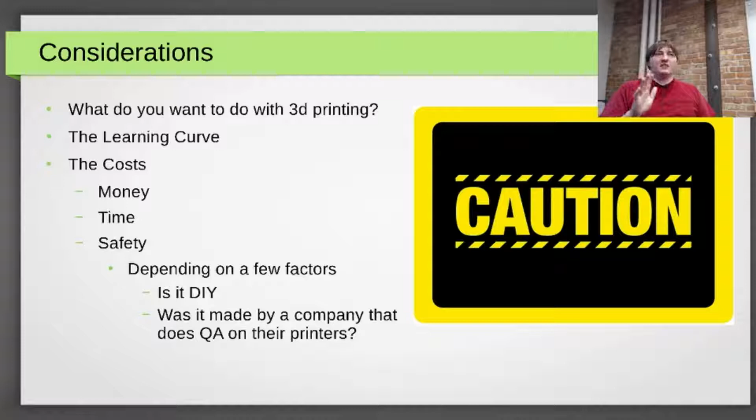So with the RepRap project - RepRap stands for Replicating Rapid Prototyper. It was started by this guy, Adrian Bowyer, I think he's emeritus professor at a school in London somewhere, in the UK. And as the story goes, his school had a 3D printer back before it was common to have, before this project existed, and he looked inside and was like, I can do that. That's not mechanically complex.

Once the patents expired on that printer, the project took off. The project really did break off. One thing that I think is really cool about 3D printing is it's a really strong testament to open source and how successful it can be when done right.

It was born in open source. People were sharing ideas back and forth. They went through this evolution period. The first RepRap printer - he had a PhD student do the first draft - and so the Darwin was born.

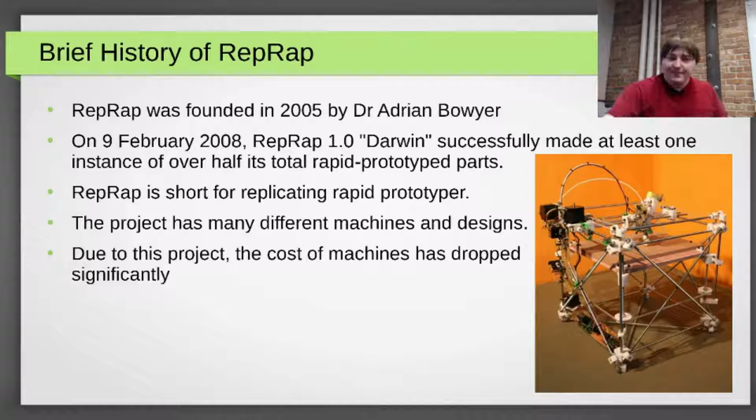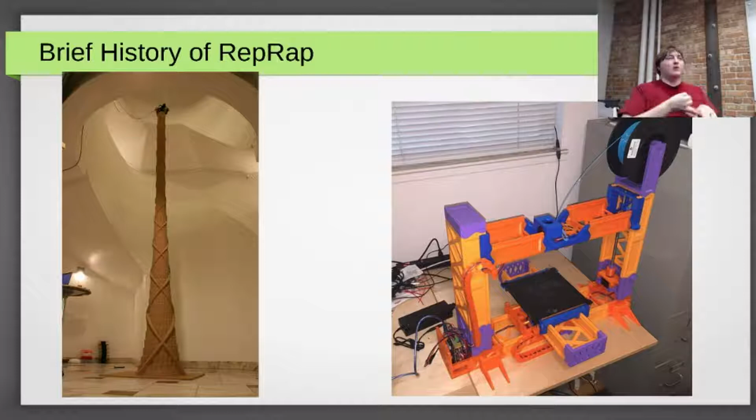The one on the right is called the Snappy. This one is relatively new, in the past 2 or 3 years. It's the mostly 3D printed 3D printer that is also self-replicating - this printer can print the parts that make it up for itself, minus the electronics and motors and things. Just really awesome.

Which brings us to this point. Not all 3D printers are RepRap-like. The ones that are RepRap are the FDM 3D printers, sometimes called FFF, which is just a fancy way of saying you melt plastic and draw pictures in layers.

The main idea here is you have your spool of filament, whatever material it is, you force it with gears through a superheated hotend, and then draw 2D layers, one layer at a time, building it up and up.

This printing process has some really cool features. Like these, I brought some show and tell. These octopuses with their joints were printed this way because of how the layers work. If you look at a link, you can cut this into layers and still have it support itself. You guys can look at these if you'd like. I also have these coasters, which are less interesting, but they're useful.

Anyway, the main safety concern with FDM is fires, since you have electronics that are heating things up. The two hot parts are your bed that you print on—sometimes you can print on a non-heated bed, but it limits the materials you can print easily—so the heated bed typically goes between 50 to 100 degrees Celsius, and the nozzle, which at minimum you print at 170 to 250 degrees.

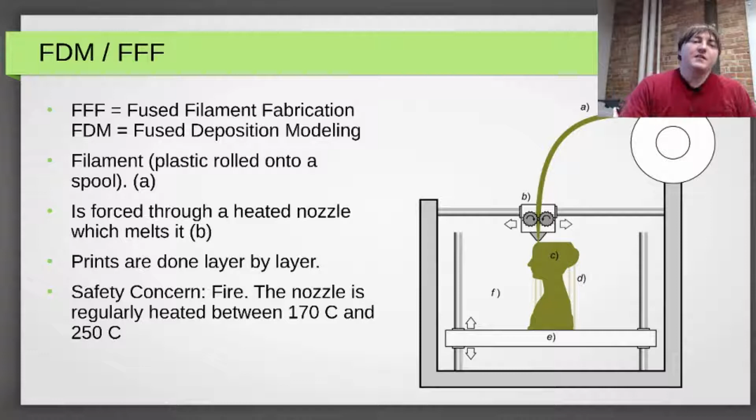The next kind of 3D printing is SLA 3D printing, stereolithography apparatus. Basically, you take this resin, and it's liquid at first. You put it in this vat, and you use a laser—whether it's a screen with UV light that prints at a certain pixel depth, or just a laser that points at a mirror and shoots at specific parts—and it will harden the resin as your print comes out.

It's kind of cool to watch. If you've ever seen a time lapse of this, it looks like somebody's just pulling—you know that old magician trick, the hat and the rabbit? Looks just like that. It's really cool.

Its main safety concern is just the resin itself. The resin is toxic—you wear gloves, you wear goggles, you don't breathe it. This has also typically and historically been much more expensive to print with. For example, the resin itself will cost you more than your spool of filament for FDM 3D printing.

So this kind, however, is starting to take off. If you're going to do something like 3D printing miniatures, this will achieve a much higher resolution and a much finer detail, if that's your goal. Typically you can get small—there's a printer I saw that's about $200 with a really tiny print resolution, but if you're doing miniatures, that's perfect.

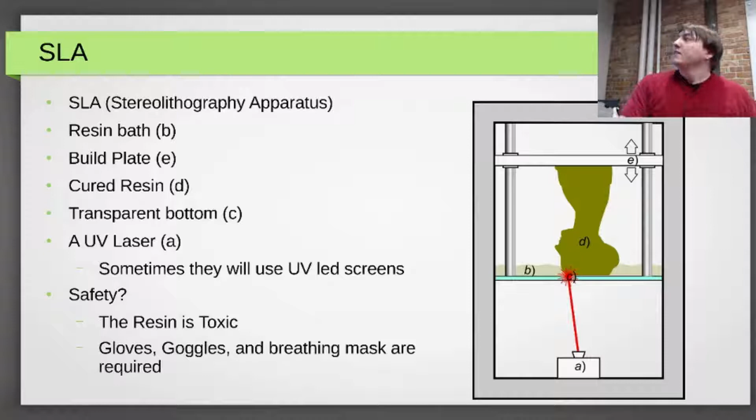Then the last kind is SLS, selective laser sintering. This is not a home viable solution—it's very expensive. I think the cheapest one I saw was either $6,000 or $9,000 for just the printer. Its main safety concerns are the fine nylon powder it uses to print, melting that nylon powder into your shape, and also there's a chance it'll cause conflict because of how much you decided to spend on this thing.

Its main advantage—if you think about the other printing styles, SLS versus SLA and FDM—is that you can't print over nothing with those, which is almost true; you can bridge small gaps, but you can't print an area that starts on nothing.

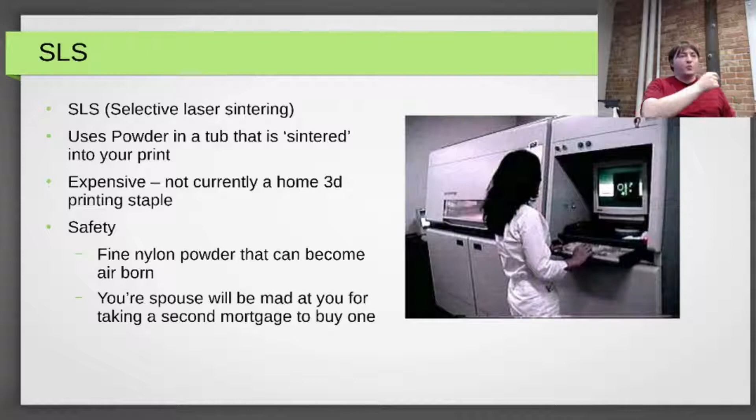With this, however, the way it works is it fills the chamber with powder at every layer. The powder that is not melted will support every layer on top of it, so you can get fine details without having to print support materials into it.

This is the part where we talk about the basics of the FDM printer's anatomy, like what it looks like and how it works. The basic parts I broke it into are the frame of the printer and the axes of printing, the extruder that actually melts the plastic and how that works, the print bed, and the electronics that control the whole operation.

This is probably the most common print design right now, the i3. Prusa himself, the guy it's named after, makes this 3D printer, but he's open sourced the design, so there are plenty of knockoffs on the internet. Mine is a knockoff that costs less than $200, which I don't actually recommend everyone getting. And spoiler alert, this is one of my recommendations. His printer costs around $700 to $1,000 - $1,000 if it's pre-assembled, or around $750 if you get it in kit form.

The way it works, if you see the dragon where it's sitting, that bed is your y-axis and it moves during the print. The print head moves left and right, and then up and down on 2 motors, and that's how the motion works.

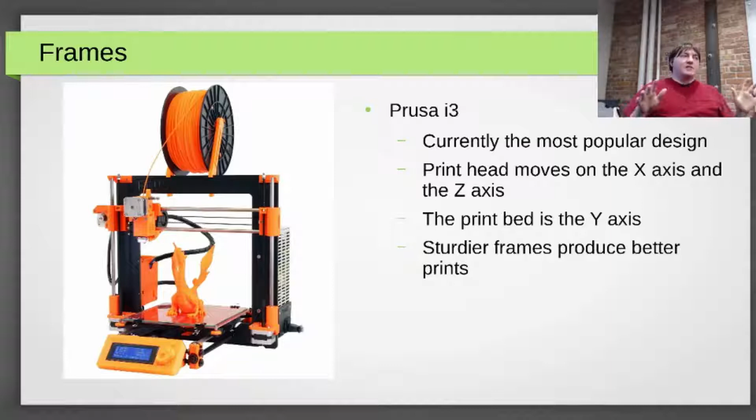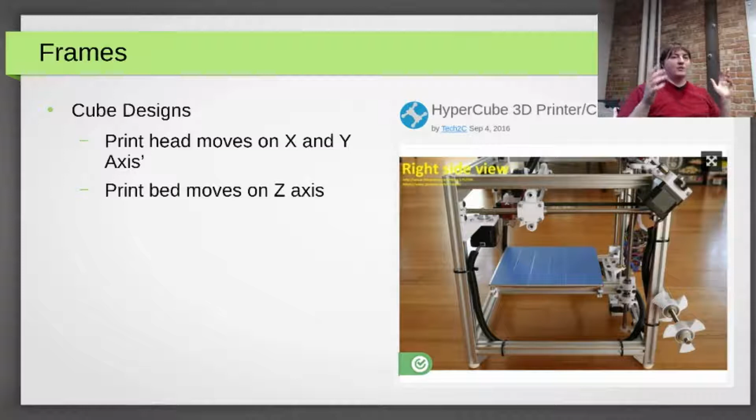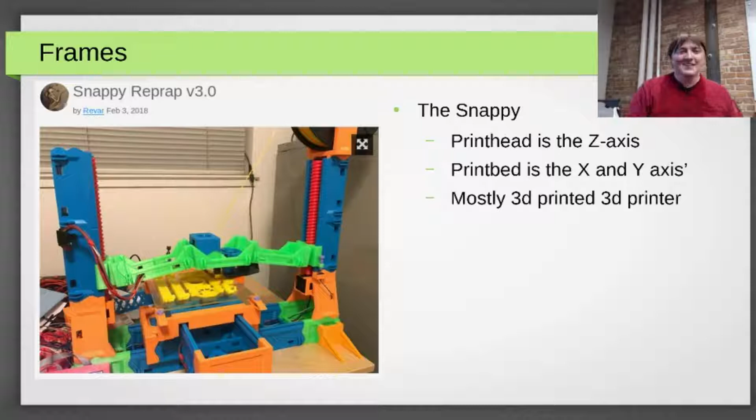And then this print, you've seen the snappy, I've never seen anything like this. This one, the print head stays stationary, only moving in the z-axis up and down, and the print bed moves in the x and y direction. It's so weird to watch when it prints. So this one is one that I added last because I'm like, oh yeah, these exist.

It's called a Delta printer, which has motors on each of those 3 rails. Delta, I think that has something to do with geometry and math. Anyway, they each move independently, and to move the print head where it needs to be, generally they have a circular base. They can achieve higher precision than the other styles.

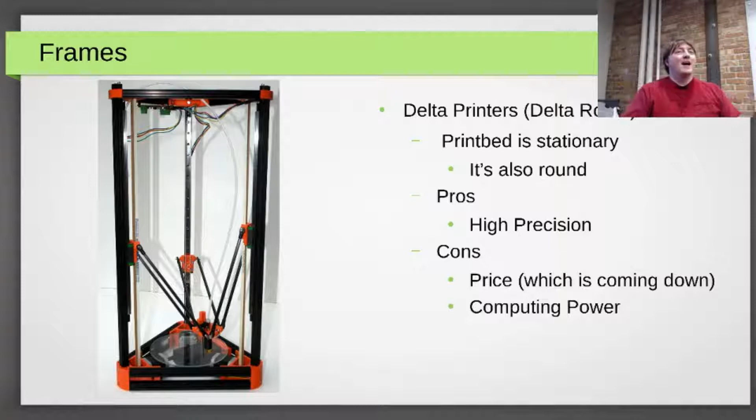Those other styles we covered are called Cartesian, which I think has something to do with the fact that it's a square and uses a grid system that's not a circle. If I remember correctly, Delta is actually a reference to the Greek letter delta that is shaped like a triangle, referencing the footprint being a triangular shape because you have the rails at the 3 corners. That makes more sense to me. I don't have a Delta printer, but yeah.

I put this GIF in here to kind of show how it works, because it's not as straightforward for my brain to grasp, and I thought maybe others would like to see a little bit of motion to show how it controls itself, because it's completely different.

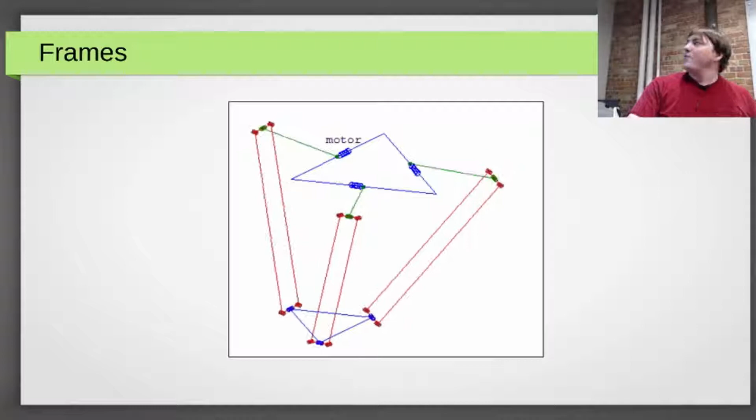One other point - these Delta 3D printers, because of their triangleness, use more processing power. Most of the FDM Cartesian printers use an 8-bit board, an Arduino, as their control board, and it works just fine. But Delta requires more math, and typically that doesn't mean you can't run a Delta printer, it just means it'll run slower than you might otherwise like. There are 32-bit boards though.

Okay, the hotend and the extruder. The basics again are you have filament and you push it through. The way it pushes through is you see that gear, and the gear is next to what is called an idler. The spring pushes the lever arm into your filament, which pushes it into the gear and holds it in place.

Then the gear pushes it through and goes through that. See the aluminum block on it? That's called the heater block. You'll have a wire plugged in that makes good contact and heats the block, that's all its purpose is. And you'll have another one, typically a thermistor, that tells the control board how hot it's gotten.

The two parts of the extruder: we have the hot end, which is the bottom part, and the cold end, which is the top part. We want to keep the cold end cold and the hot end hot. Typically people will put a fan directly on the extruder part so it prevents heat from going back up into the system and helps your filament melt consistently and go through.

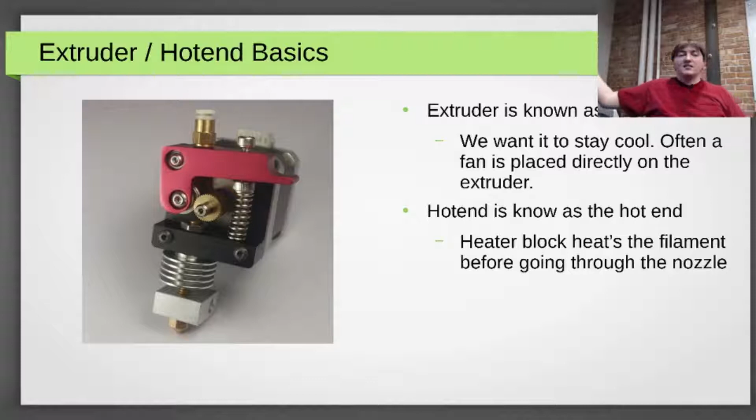That's what it is. This style of extruder is called a direct drive extruder. There are lots of kinds of filaments. Flexible filaments are a thing, you can make your own flexible phone case. People have 3D printed their own shoes, you can find models online if you want to print your own shoes, though I don't know how well that will work out for you. The direct drive has the advantage of handling the filament very tightly and confined, so it can get it from point A to point B, and that's why they work better with that.

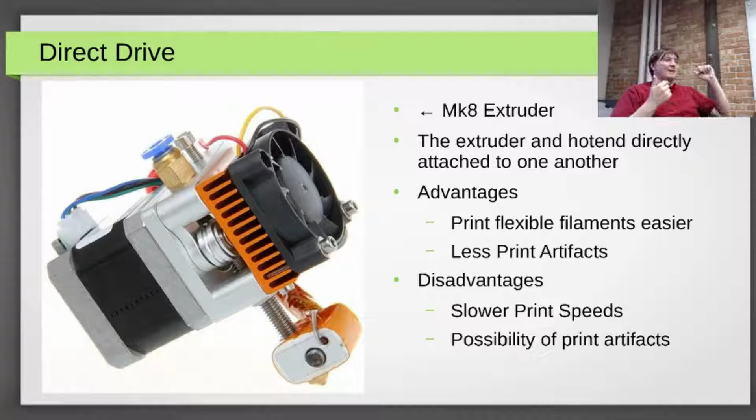The other style is called a Bowden, where you still have the hot end and the cold end, they're just separated by a long tube. So you force the filament through the tube, through the extruder part, and then it gets to the hot end and melts it. The advantage of this is you have a lot less weight on the end.

The disadvantage is when you're printing, if you jump between two parts that aren't supposed to have filament, it needs to do what's called a retract, because the filament's just going to keep going. Retraction just means the gear spins the other way and sucks it back in. With this style, the retractions are not as quick, there's a lot more distance to cover, and so they will result in stringing. There are tests for this where you print two poles and see how well you've got your stringing under control.

But the advantage with it is faster print speeds, which may or may not matter to you if you're doing it as a hobby. But if it does matter, you're probably just going to put up with the stringing anyway.

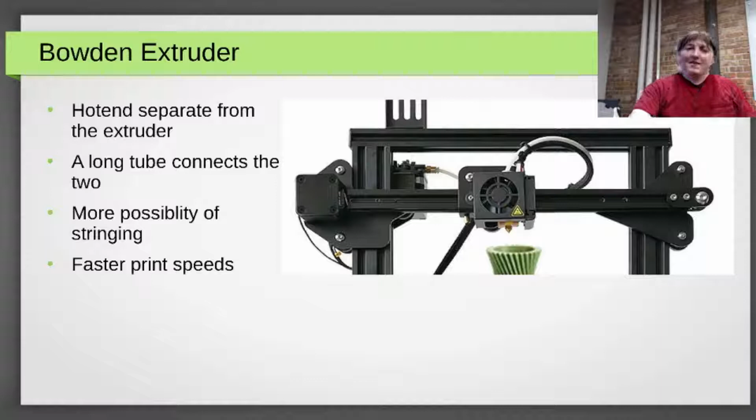So print beds, there are different styles of surfaces that you can print on. The idea with your print bed is there's a lot of motion going on while your part is printing, you need to make sure it stays on your print bed. Some common ones are just putting painter's tape on it, which has a really good surface for that. Glass and painter's tape will work well for PLA, which I'll cover the materials in a bit, but not any of the other materials really well. Glass in conjunction with a heated bed, which is the board underneath it, also works well for PLA.

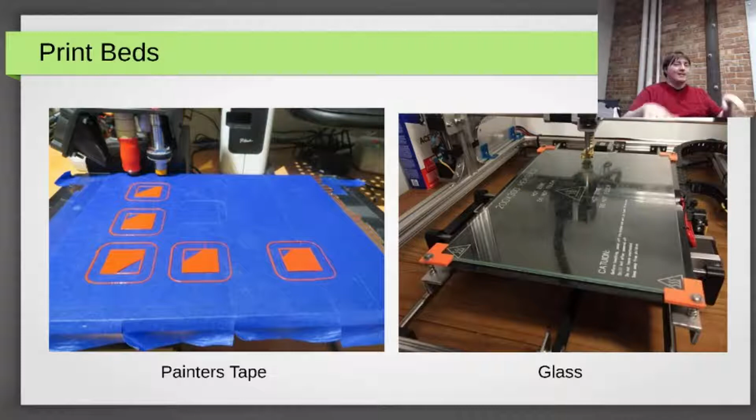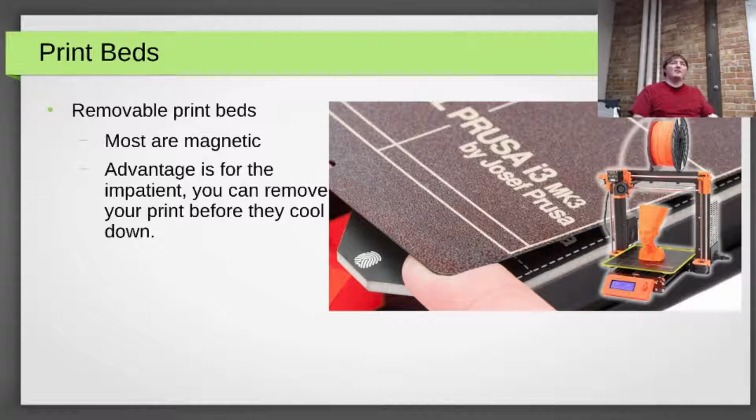Also, something I do is put a little bit of glue, PVA, on the bottom, and for prints that just aren't sticking, I put glue on, which creates the same rough surface that allows it to stick to the bed. The other kinds are removable print beds, which can also be coated. They're generally coated with things, but most people like them. I feel like they're for the impatient, because you can take your print off while it's still hot and just pop it off without having to get a scraper or something else.

The classic combo for control boards is an Arduino Mega 2560 and a RAMPS board, which just plugs into your Arduino board. Most kit printers don't actually need this separately, though—most kit printers actually come with an all-in-one board that combines the Arduino controller chip with the plugs for everything else.

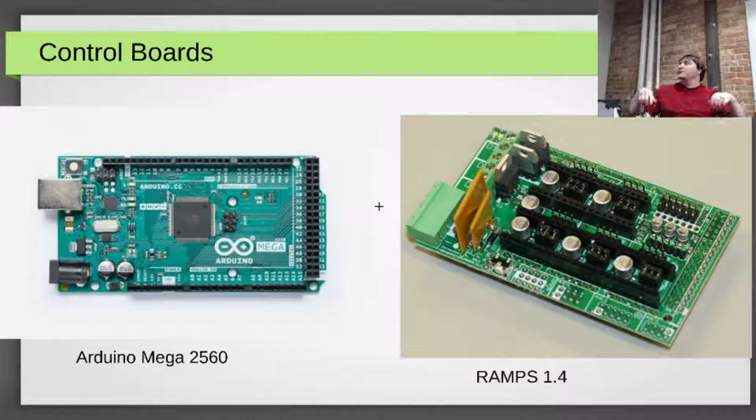This is not quite sufficient on its own. You also need stepper drivers, which tell your motors how much to move, how far to move, and so on. They're adjustable, and depending on your printer, you can run them without active cooling, though sometimes you need it. The slide I skipped over is the firmware—that's just the program that runs on your Arduino and tells it how to operate.

There are other accessories you can get. A common question is how you start your print. You can get an LCD screen with a knob, plug it in, and program it with your main board—that works. You can also just plug a USB from your Arduino into your computer and use a controller interface there. The advantage of a separate LCD screen and SD card is you don't have to keep your computer plugged in, so if your computer dies, your print stays alive—though if your computer dies for an unknown reason, chances are your printer's in a bad position too. But it also means you don't have to tie up your computer, which is nice if you're using a laptop.

Do you have any suggestions on what you could use software-wise on your computer?

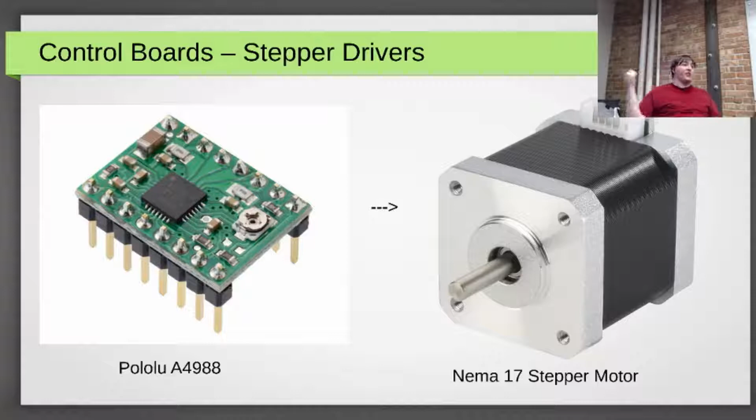Let's see—oh yeah, FDM print materials. This is just a bunch of information; I tried to put the key in the upper left-hand corner.

One thing about materials: apparently, from what someone else was saying, glass transition temperature is kind of a fake measurement, but it's still useful, so we're using it. That's the point where your print will start to become all wobbly again.

These prints I brought for show and tell are all made out of PLA, polylactic acid, which is a plant-based print material. If you had a high-heat composting environment, you could decompose these naturally, but without high heat they don't decompose well, so it's still kind of a problem.

The PLA, if you leave it in your car on a hot day, will deform—not quite melt, but deform. However, PLA also has this really interesting property, a lot of them anyway, where if you leave them at the right heat for long enough, they will anneal and become heat resistant, which is really cool.

There's a kind of PLA called high temperature PLA that is specifically made for that, and you can print heat resistant and very strong materials with it.

One of the other things about PLA that you'll run into, like the octopuses, they're glow in the dark. The glow-in-the-dark filament is actually an abrasive material.

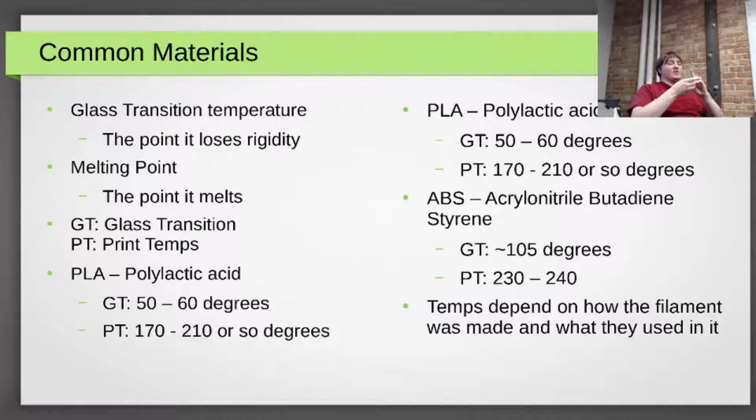Going back to the hotend, the extruder part, the nozzles are made of various materials. The most common is brass. You should not print glow-in-the-dark or any abrasive material with a brass nozzle, because the diameter of the nozzle will change very quickly. What you do with abrasive materials is you get a hardened steel nozzle or a ruby tipped one. They have those. I don't have one, but you need something that's more resistant to wear, and those ones will not change while you print.

Of the two other ones, ABS—its main disadvantage is, all of these, when you print, sometimes you'll get a smell. PLA has a sweet smell, being plant-based and sugar-based. ABS is acrid, and most people agree that it's probably not good for you.

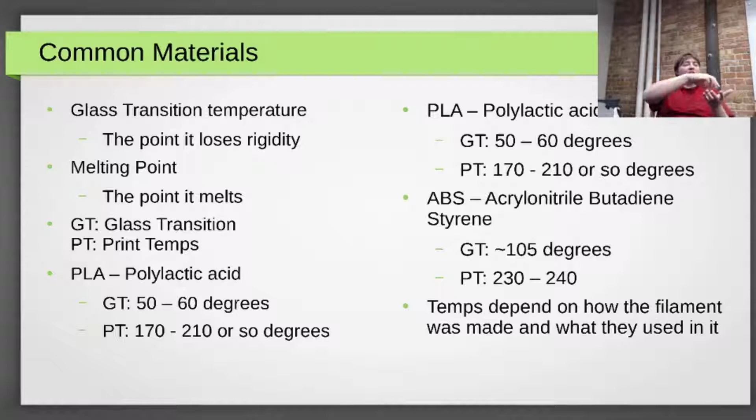There's another material that I put PLA twice for. What did I do? Am I dumb? One of those was supposed to be PET, which kind of has the best of both worlds. Its glass transition temperature is not as high as ABS, but it's still high enough that it's useful for working parts. It also doesn't have the same acrid fumes.

Isn't that the plastic that things like drink bottles are made out of and stuff? Yeah, it is actually. I don't know how easy it would be to turn your old drink bottles into it, but it's the same stuff most of the time.

But there are also many kinds of PET. The print temperatures, however, for PET are a little higher, usually than even ABS. Some PETs are low enough that you can still do it on a regular printer. But anyway...

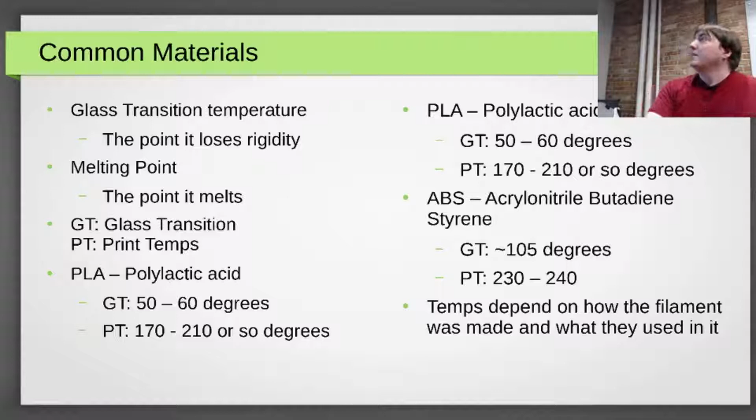Before getting into how to print, one thing that I mentioned but didn't really go into detail of: the hotend that you're forcing your material through. In general, they're lined with PTFE, which has an acronym I don't remember what it stands for. But it's sort of like Teflon, it's non-stick. The main reason for that is if you have imperfections in how your hot end and heater block and everything was drilled, your material will stick to those imperfections. It needs to be super clean. But with PTFE going in there, it doesn't have to be as well machined, and it can get through.

The downside of using PTFE is once you get to about 240 or 250 degrees Celsius, it will start to decay and degrade and do nasty things from what I understand. I haven't tried this and I don't plan to. There are companies that make all-metal hot ends that are machined very well, and those can print at temperatures as high as 300 degrees Celsius before the aluminum starts to melt.

Anyway, so the basic process for 3D printing is you either create your 3D model or download one from Thingiverse, which is most of these. I didn't design any of these. Other people designed them, I printed them, because good practice.

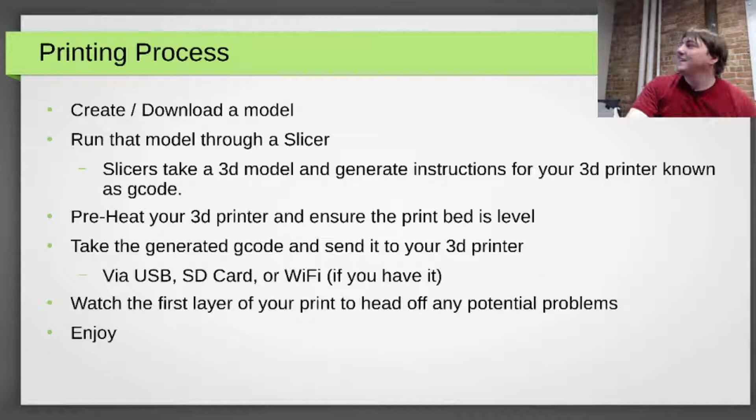And now for the recommendation portion of the show of 3D printers. So I went through and I selected a cheap printer and then a more expensive printer, both sub $1,000, because that's important to me. There are plenty of other printers out there, so if you're going to get into 3D printing, it's okay to spend some time doing more research.

But the first one is the Ender 3. This one is because it's probably the most common. It's made by a company called Creality, a China-based manufacturing company. Their product works really well out of the gate. It's not perfect, but it also has improvement potential. The main flaw I can think of off the top of my head is on the original Ender 3, not the Ender 3 Pro, their fan duct is facing up.

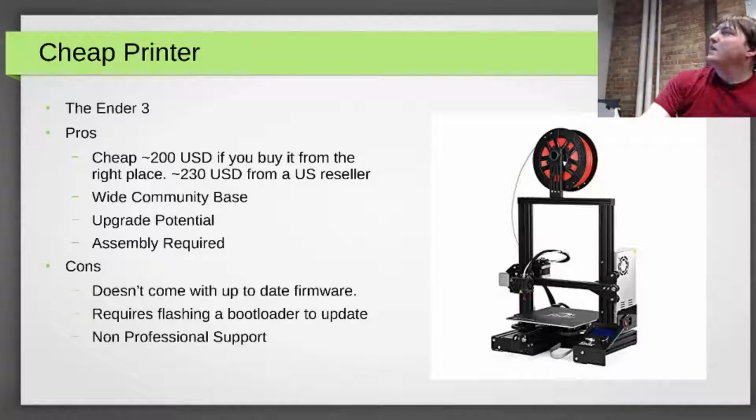And then the expensive printer, the Prusa i3, made by the guy who made the i3 design. You buy it, and there is still a wide community base. You get good technical support—he hires staff to answer questions. You get all the bells and whistles of 3D printers. This one comes with a removable print bed, it still has the same sturdy design, and it has some custom features like collision detection.

One thing that happens to your prints as they go, especially if you don't have good enough cooling, is your prints will warp—the layer will warp up, which can sometimes cause it to cool down, then the print head comes back, smacks into it, and all of a sudden your print is skewed. This one has a feature where it will detect that, reset itself, and try to resume printing. It has all the bells and whistles you can get for under that price point.

And let's see, there was one more printer plan I had a suggestion for, which is the DIY route. If you're really confident in your electronics abilities, your machining abilities, and all that stuff, the RepRap way. There are people who've taken the Prusa i3 genuine design and tried to clone it. Like this one guy took a saw and just cut his frame using a steady hand and a keen eye, and got his printer working that well.

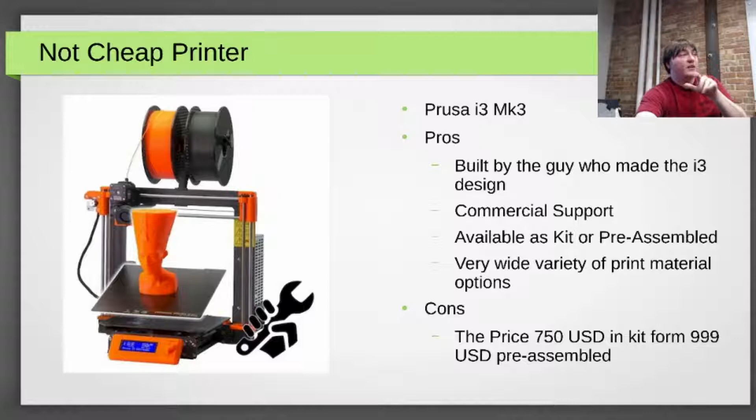Like all the features of Prusa's printer, he open sources everything, including all the collision detection—that's in mainline Marlin firmware now. But anyway, you can do whatever you want, you can build it however you want. People who like the Hangprinter—you could make a printer that prints from the ceiling.

So good. And then, as I'm not quite out of time, bonus: there are some 3D modeling softwares that, if you want to make your own designs, all you really need is a 3D modeler that can produce an STL file, which I think stands for stereolithography, or something like that.

The basics of how it works: you just express your shapes in a language. Like, you take your cube, subtract another cube from it, hey, you've got a box. It works really well for functional prints and designs that you may change and tweak later.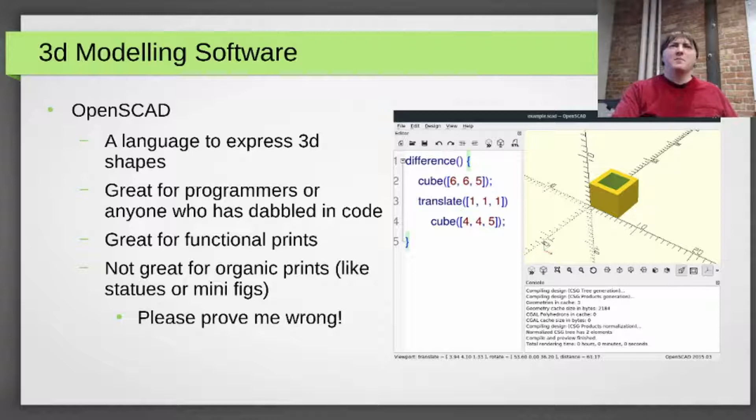Also, I said it's not great for organic prints. I would really love to be proven wrong on that, because I love being proved wrong, actually, strangely, on a lot of things. And then there are ones I don't use.

Everything else is an honorable mention. Probably the most popular one is Tinkercad. It runs in your browser. It's not open source, but it runs in your browser. And by the way, I did not mention that the Windows 3D modeling tool, whatever it's called—I'm pretty sure that's not open source either, but I didn't note it, so I feel like I should say it.